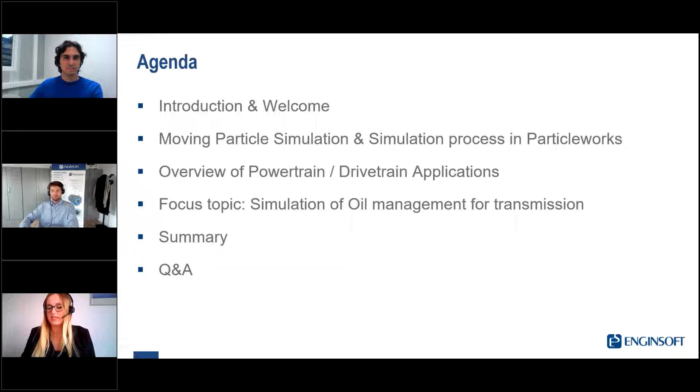Now, I would like to move on and briefly introduce today's 2 key speakers to you. First, I would like to introduce our guest speaker, Mattia Porchetta. He currently works as oil management engineer for Tremec in Belgium and will provide us with industry insights into the role of simulation on how to improve the oil management in transmissions for high-performance applications. Mattia, thank you for joining us here today.

Perhaps you'd like to give a small wave so everyone knows who I'm talking to. And I really hope I got your last name slightly right. Yes, thank you. Thank you.

The other speaker I would like to introduce to you is Simon Habecke, who works as application engineer here at EnginSoft Germany. He has prepared an introductory presentation on Particleworks and its moving particle simulation, as well as an overview of Particleworks applications in powertrain and drivetrain for you. Welcome, Simon. We are glad to have you too.

If you want to give a small wave also, so everyone knows who you are. Hello, everyone. Thank you.

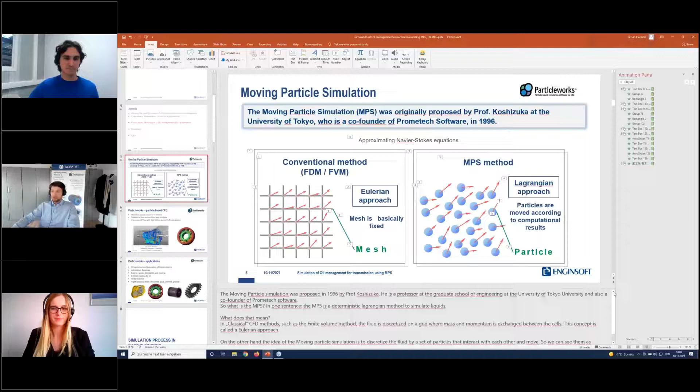So as Alina said, I will take you through a brief introduction of Particleworks and the underlying methodology, the moving particle simulation, and then also present some recent use cases that have already been presented before, and then hand over to Mattia, who will tell us a little bit about Tremec's application of Particleworks in their development process.

So Particleworks is a particle-based CFD tool which uses a numerical method called the moving particle simulation. The moving particle simulation was originally proposed by Professor Koshizuka, who's a professor at the University of Tokyo at the Graduate School of Engineering. He is also a co-founder of Prometech Software, which is the developing company behind Particleworks, and he proposed this method basically as an evolution to the smooth particle hydrodynamics in 1996.

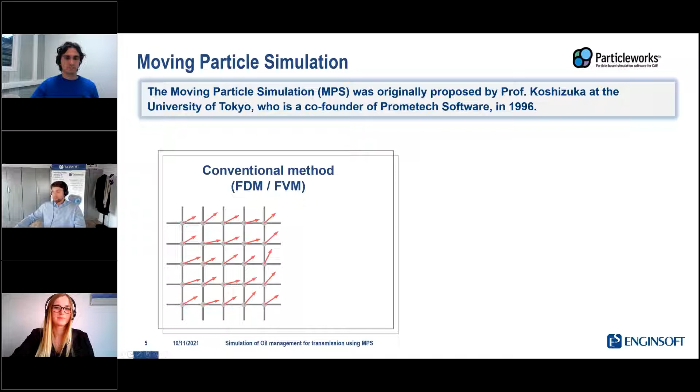So for those of you who are familiar with CFD in principle, you might be familiar with the so-called finite volume method, which is an Eulerian CFD methodology where you basically discretize the fluid volume with a numerical grid on which the fluid movement is solved and simulated. Instead, the MPS, so the moving particle simulation, uses a particle-based approach. So that's the definition of a Lagrangian approach, where the fluid is discretized by a set of dynamic particles.

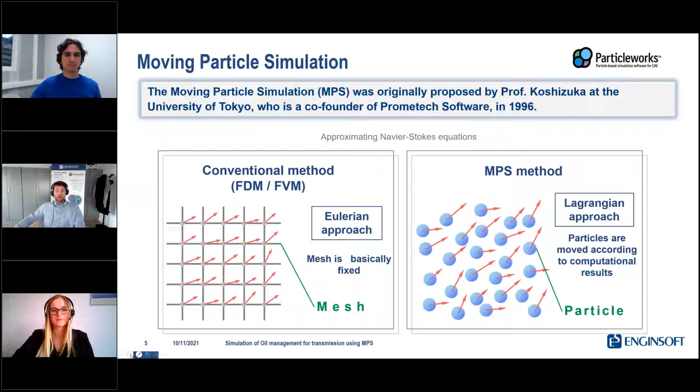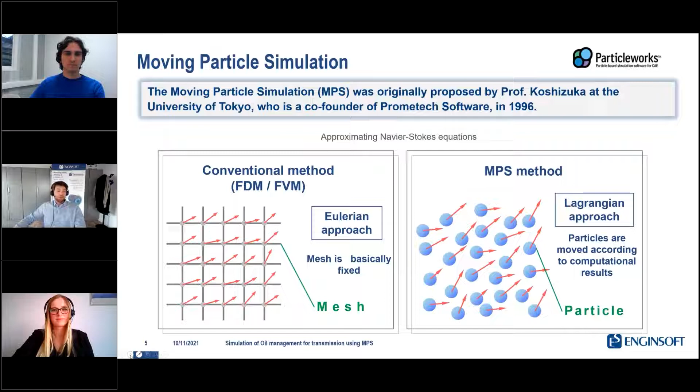So basically, we can understand our particles as dynamic calculation points which represent our fluid, and these fluid particles interact not only with each other, but also, of course, with the other boundary conditions that we can impose on the simulation model. And also the MPS, just as most of the finite volume methods, approximates the Navier-Stokes equations as the fundamental governing equations in computational fluid dynamics.

So Particleworks is a tool that, as said, uses the MPS. Since we do not need to extract the fluid volume, but instead can discretize the liquid with our particles, we're talking about a mesh-free method, which is especially suitable to simulate free surface flows and related problems like liquid sloshing or liquid jets.

And then, of course, as we see here in this animation, we can also simulate the interaction not only with rigid bodies, but there would also be other applications where we can potentially extend the model to also introduce sand into the gearbox, for example, which in real life, of course, we want to avoid, or also include flexible bodies into the system. And what we see here on the right-hand side shows Particleworks' capability to also simulate highly viscous or non-Newtonian fluids such as grease.

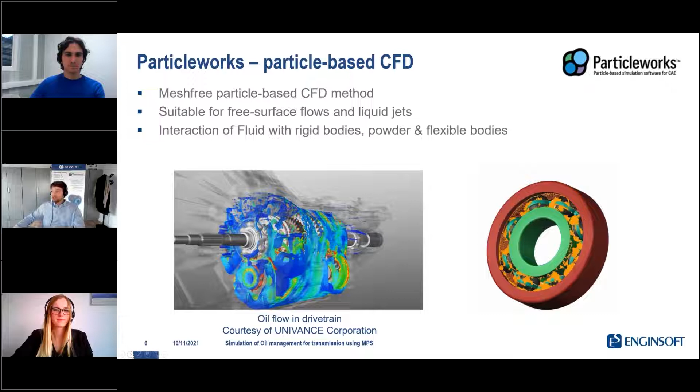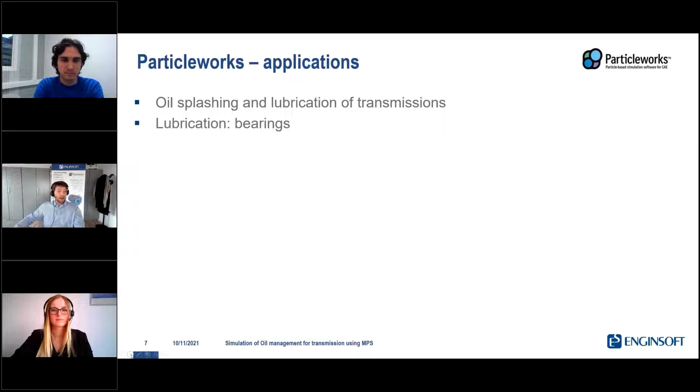So the type of applications which we can handle with this sort of methodology range from oil splashing and lubrication of gearboxes and transmissions, and we will learn later more about that from Mattia. Then in the overall topic of lubrication, of course, we can also have a closer focus on the bearing itself.

Then with the same methodology, we can also handle certain applications in the field of engine or piston lubrication and also cooling. So this actually covers both conventional internal combustion engines as well as electric engines, which nowadays are more and more internally cooled by oil jets.

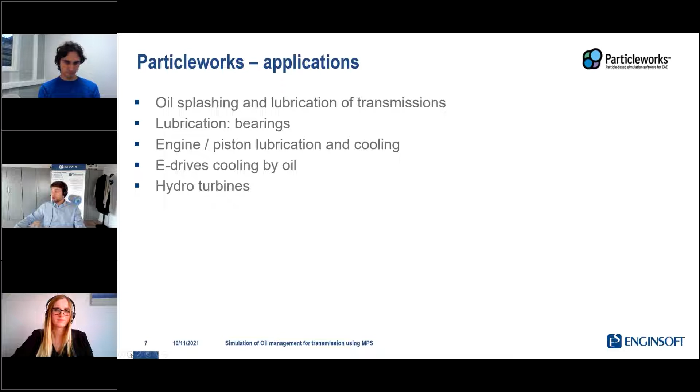Then in a slightly different industry, in the energy sector, we can also perform simulation of hydro turbines, which is particularly efficient for turbines like a Pelton or a Banki turbine, where we also have free surface flows. And then more focused on the process or chemical industry, we can also simulate highly viscous or non-Newtonian fluids ranging from chocolate, glue, cement, or grease, just to give you some examples.

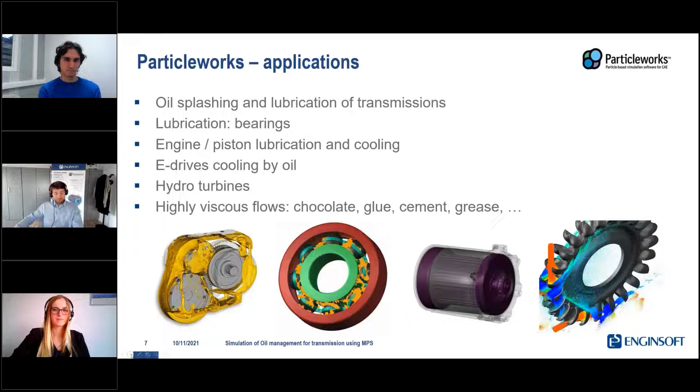So now we see all these nice animations which show some of the visualization options that Particleworks can provide us during the post-processing. So in the next slides, I will give you a very brief overview to give you some impressions about how such a simulation is potentially set up, to give you an idea of the simulation workflow.

So the first step actually takes place before the simulation, with the geometric preparation of the model, which we then import into Particleworks. In principle, we do not need to perform any larger simplifications, but we just export each part, like a shaft or a gear, that later in the simulation model we want to set with a separate kinematic motion, as separate STL or OBJ files, which are the formats that Particleworks can read. So inside of Particleworks, we import the non-simplified geometries.

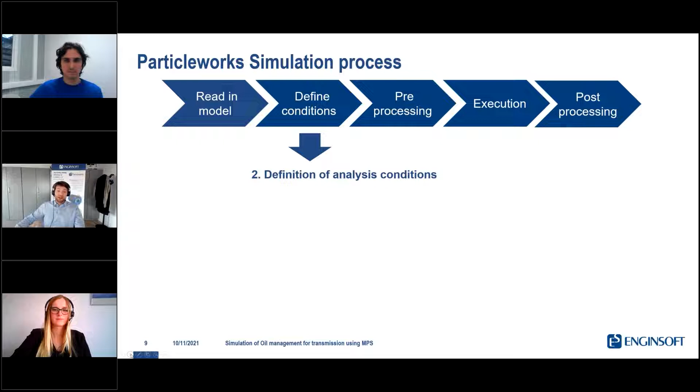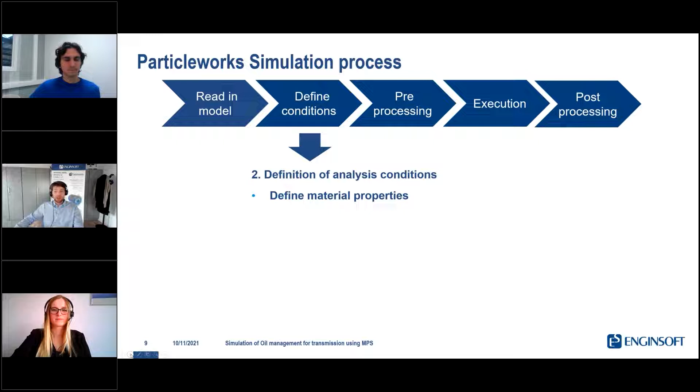Then in the next step, we define the analysis conditions. That includes, first of all, the material properties which characterize our fluid. For oil, this would be the density, kinematic viscosity, some surface tension parameters. Then we also need to define the kinematics, so the motion of our shafts and gears.

And then to introduce the oil or the liquid into our simulation model, we can define, or actually both in the same model, a filling plane, which can introduce an initial fill level into the simulation model, and also create inflows and outflows, which can introduce new oil into the simulation and also take oil out of the simulation. And therefore, this also enables us to model forced lubrication systems.

Then, since we're talking about a simulation tool, we also need to set some numerical parameters like the time step, which is typically estimated by our rotational speed, and the particle size which we are using for the simulation, plus some other numerical settings, which we won't cover in this webinar.

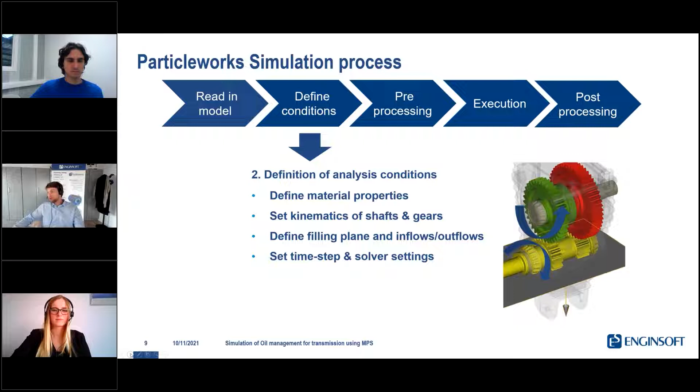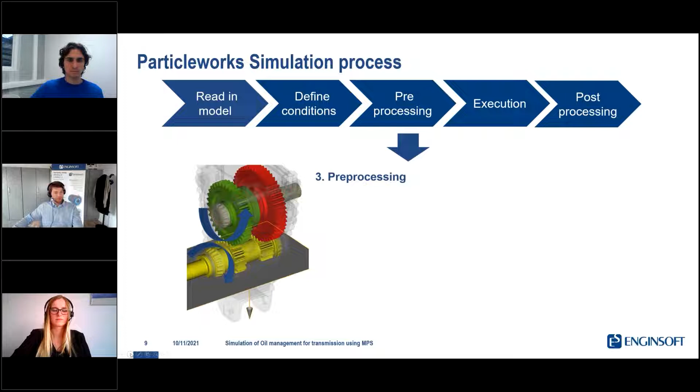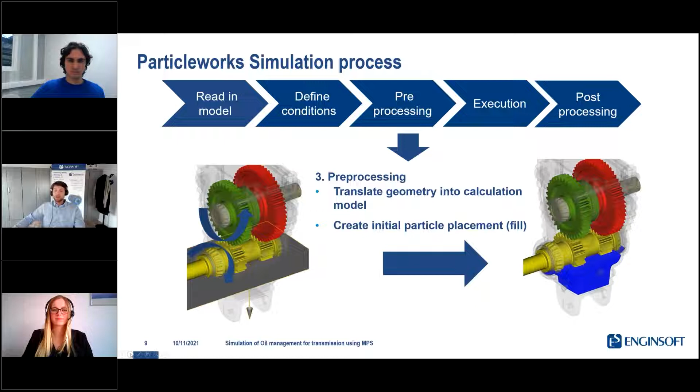So after we imported the geometry and defined our kinematic conditions, the pre-processing of course comes next. We perform the pre-processing, during which the geometrical model is first automatically translated into the internal calculation model, which is used by the actual simulation. And then the initial particle placement, for example during the fill operation, is also performed, so that our gearbox might already be pre-filled with oil particles.

Then during the actual simulation, we perform the calculation, which will calculate our liquid movement. We can use one or, depending on the model size, multiple GPUs. We can also leverage CPU clusters, while according to our experience, the use of GPUs is more efficient. The software runs both on Windows and on Linux.

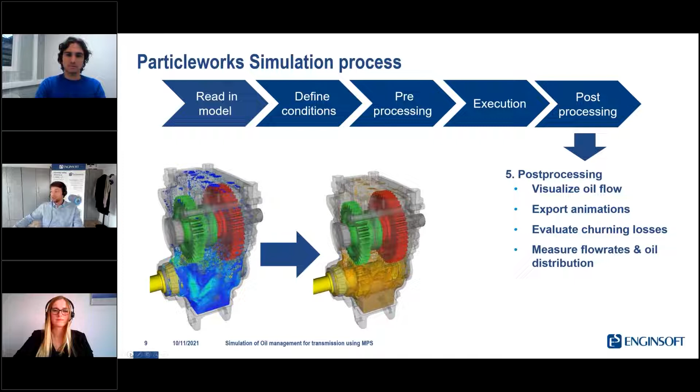And now coming to the aforementioned post-processing. This gives us the insights we are looking for by using the simulations, which can be the visualization of the oil flow. We can export animations, in principle also evaluate the churning losses, and also measure flow rates and the oil distribution in different parts of the housing.

So the advantage such a meshless simulation approach gives us is the overall reduction of the simulation time, since we do not need to simplify the geometry, we do not need to perform any meshing, and it's very robust and easy to implement complex kinematics.

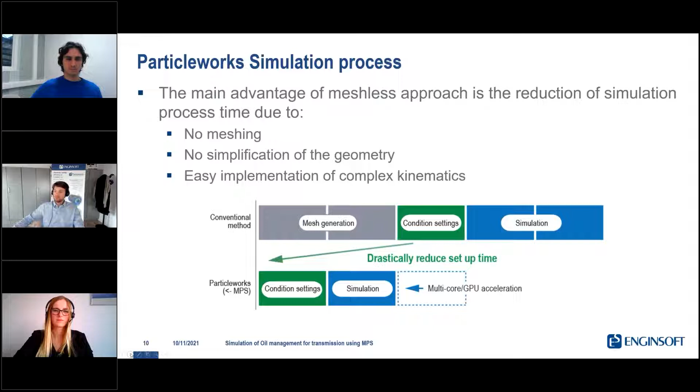So now coming to some applications that have been presented in webinars or at conferences before. I will just give you some key points.

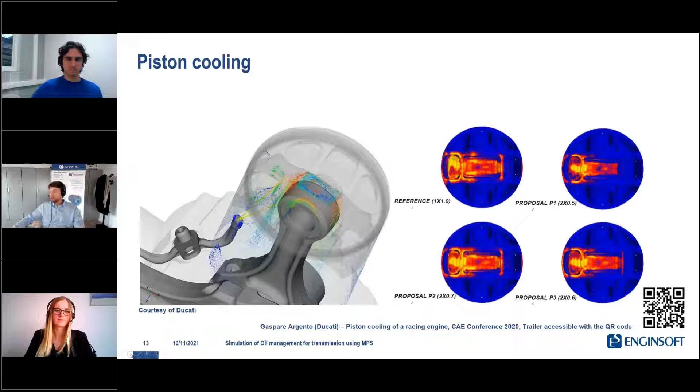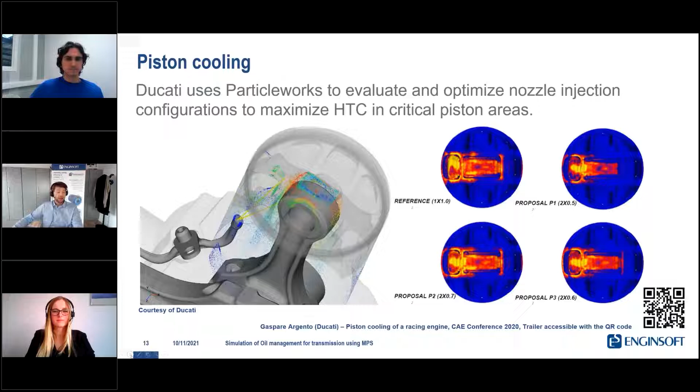So the first application I wanted to give you a brief peek into was presented by Ducati Corse at the CAE conference last year. In this case study, Ducati presented their application to evaluate and then also optimize different nozzle configurations with the aim to maximize the HTC distribution on the undercrown of a motorcycle piston. If you scan the QR code on the bottom right side, you will come to a link where you can view, I think, a trailer or a review of the actual presentation.

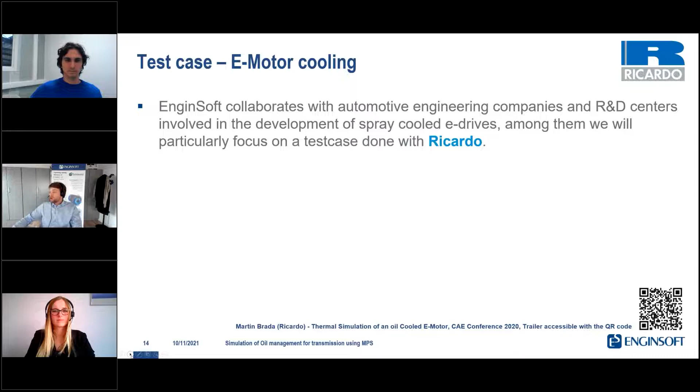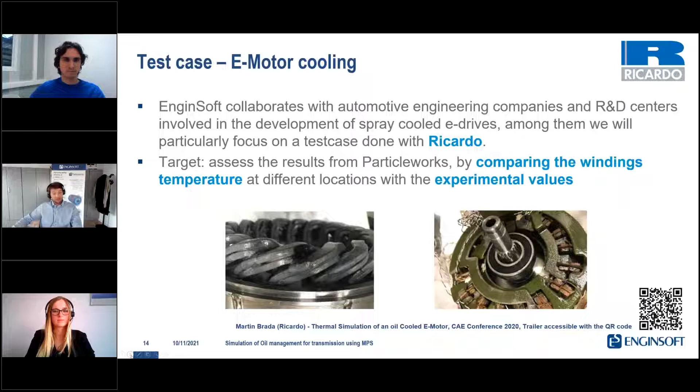Then a similar application, from a software perspective in terms of what was simulated, was also presented at the last CAE conference in collaboration with Ricardo, but this time the aim was to simulate the internal oil cooling of an electric motor, with the target to compare the winding temperatures at different locations with experimental values. In that simulation workflow, Particleworks was used to simulate the oil distribution and HTC distribution on the windings due to the oil jets sprayed from the rotor shaft, to finally calculate the resulting temperatures in the windings with the help of an FE tool.

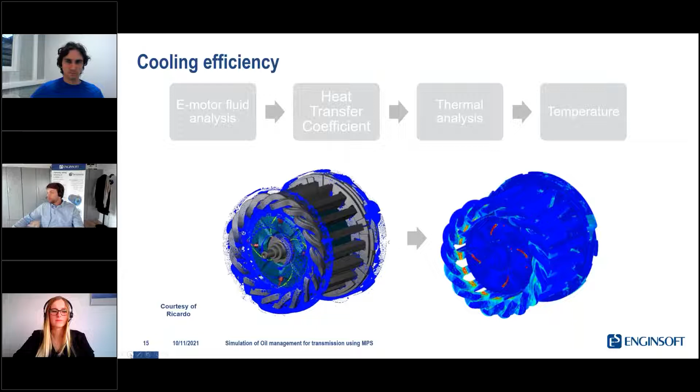In the result of this case study, we are also provided with some absolute values regarding the difference between experimental values and measurements, which were below the requirement of 5 degrees Celsius. So this gave some confidence and validation into the use of Particleworks for such applications.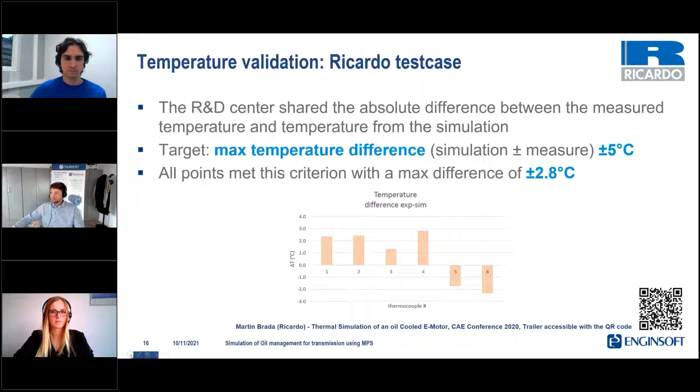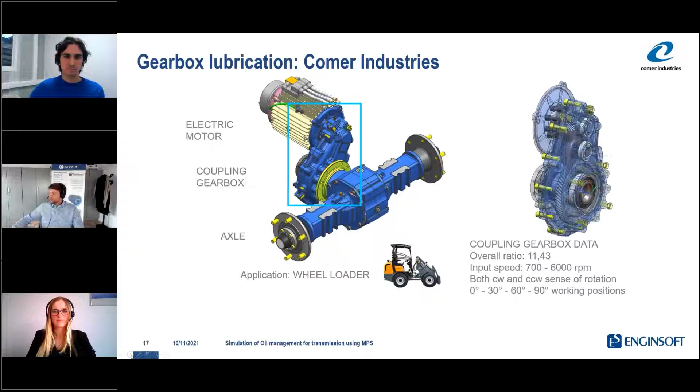Now I will come to the last case study, which was presented by Comer Industries at the CAE conference 2019, or actually 2018, where the objective was to simulate the oil distribution in a coupling gearbox between an electric motor and an axle of a wheel loader. The aim was to compare the oil distribution in different operating conditions, like the mounting position and the operating speed, and finally to assess the bearing lubrication in all these different operating conditions.

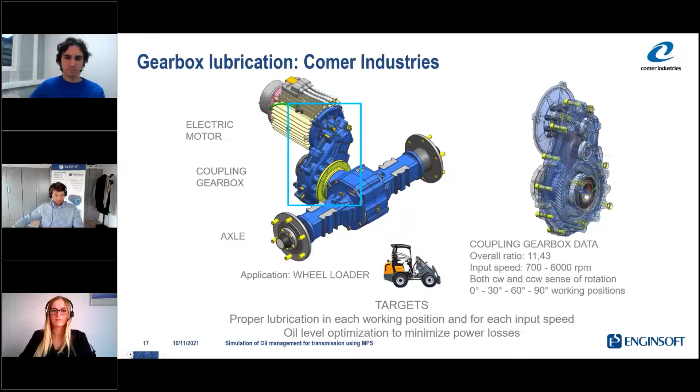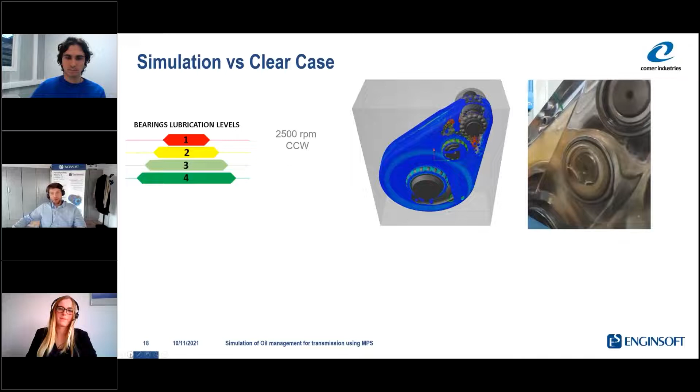In here, they not only did a visual comparison of the oil flow patterns, but also evaluated the qualitative lubrication of the different bearing positions with the help of a qualitative scale. Comer found that there was a very good correlation between simulations and tests for this type of gearbox. Just by the coloring, we can see that there was a very good correlation. My personal highlight is this flooding of this bearing, which could be identified both in the simulations and the experiments.

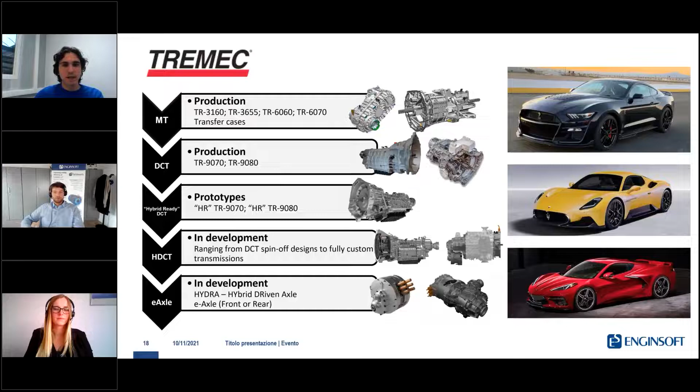For the test case of today, I will refer to the TR9070. As I said before, it's our inline DCT transmission. It's 7-speed, it can transfer up to 900 Newton meters with a maximum input speed of 9,000 RPM, and it can shift in very short times of only 80 milliseconds.

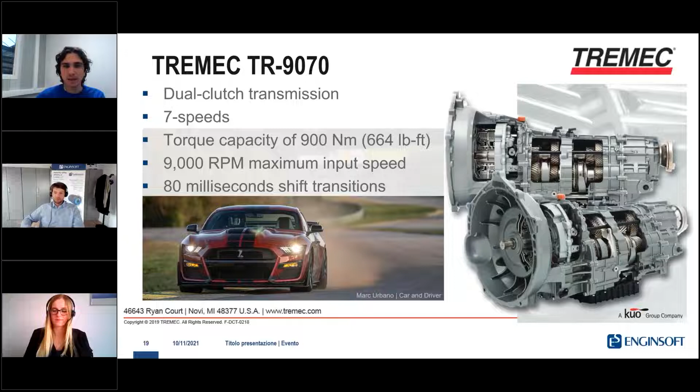So why is oil management important for our transmissions? First of all, because of lubrication. In general, we want to avoid metal-to-metal contact between mating surfaces, as this can lead to excessive wear or even damage and potential failure of the part. The lubricant can also act as a coolant, so it's needed to dissipate the heat generated. There can be different lubrication strategies, for example splash lubrication or forced lubrication. So it's important to have proper lubrication in the transmission, and to do this efficiently.

Well, I think that all of us know that it's very important, for example, nowadays for car manufacturers to keep the fuel consumption low. But not only this: inefficiency will translate into heat generation. This can potentially lead to high temperature, overheating and hotspot issues. So being efficient means that it's going to be easier to design a proper cooling circuit and cooling system, and also downsizing some of the components like the heat exchanger.

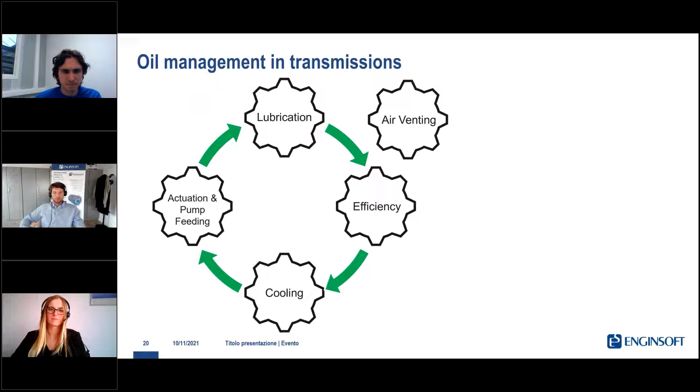So how do we monitor all of these parameters? Well, first of all, we started with CFD. We extensively use the moving particles method. During last year, it turned out to be quite effective, and it's a powerful tool. It gives you a lot of flexibility. It's very easy to change the geometry and perform thought experiments like playing with the input conditions and the boundary conditions. And we mainly use this to drive the design from the very early phases of our project.

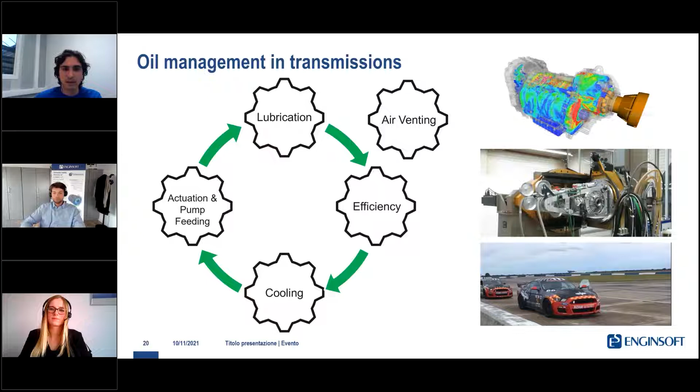The final validation, of course, has to happen in the vehicle. This, I will say, is the least flexible kind of test because it's very difficult to access the transmission. It's time consuming and also very, very expensive. So usually you want to perform this kind of test during the advanced phases of the program. You don't want to really use this kind of test for the initial development of your products because it's going to be very, very expensive.

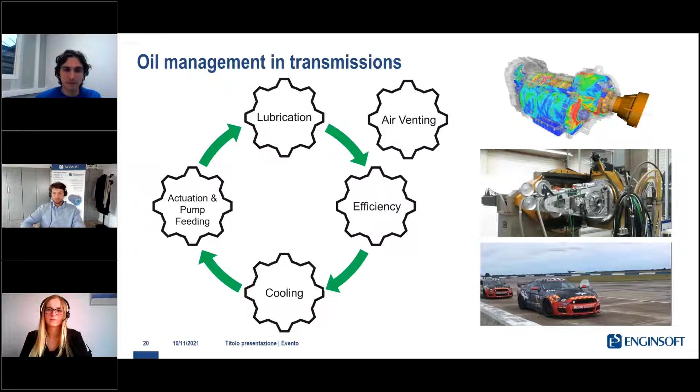So what happened with our TR9070? Actually, at that time, we were not using the moving particle simulation method. So we didn't go through the workflow that I just presented. And we ended up in a very late stage of our program with a suction issue. This happened in the vehicle. We were testing at Gingerman track, and in a specific corner with a specific driver, what happened was that after the long straight, when braking into a left corner, we experienced some oil starvation in our sump pan, and this led to a system pressure fault with the clutch disengaging and not being able to transfer the torque for a while.

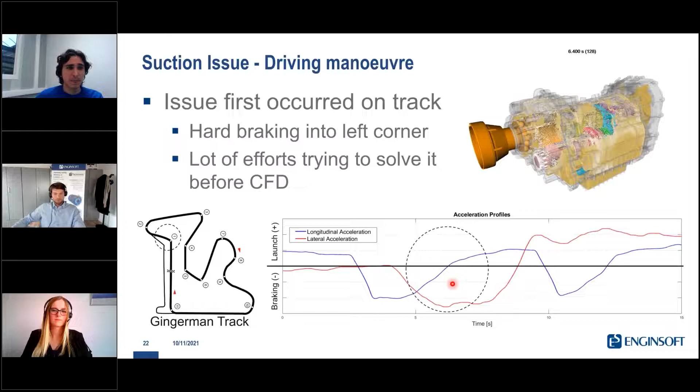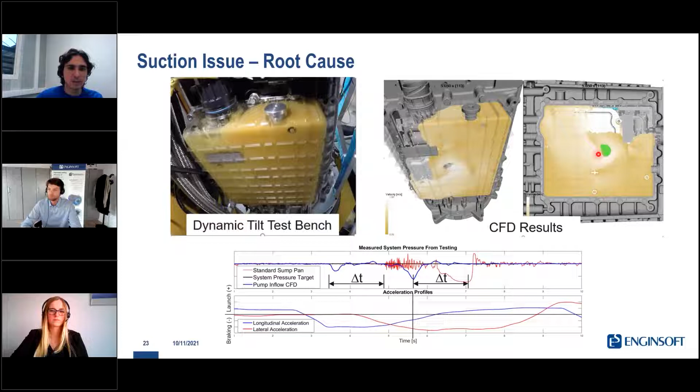Another thing that we noticed from the CFD results was this kind of swirling motion. So the oil tended to move along the outer walls of the sump pan, leading the pickup of the pump or the inlet of the filter to be exposed to air.

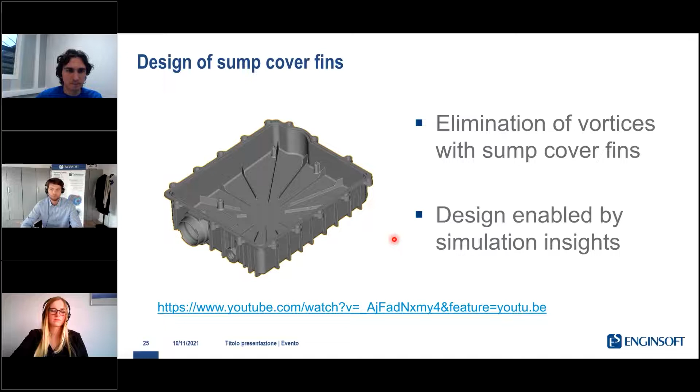So what we did, well, as I said, we were in an advanced stage of our program. We needed to find a quick solution, and we tried to introduce some guiding features, some fins in the sump pan, with the idea of forcing the oil to always move towards the center of it, where the inlet of the filter was located. We then performed a CFD simulation to compare the standard sump with a modified one. And what we saw was that during the critical condition, the swirling motion disappeared, and the inlet of the filter was mainly submerged in oil.

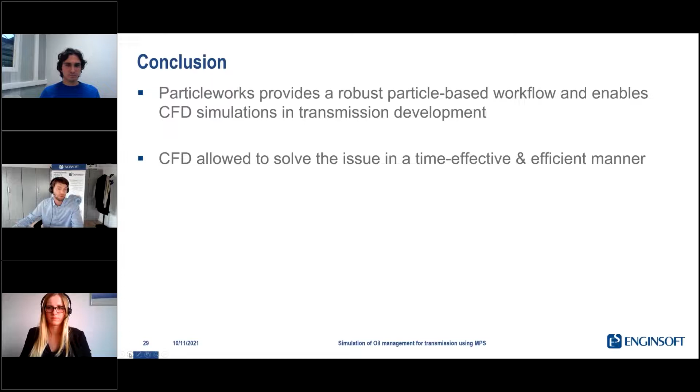So I will draw a brief conclusion of today's webinar before we go over to the Q&A session. So we have seen that Particleworks provides a robust particle-based workflow, and also enables CFD simulations in the transmission development. And then, as Mattia pointed out, this use of CFD in the development process allowed us to solve issues that were very difficult to solve before, and also in a time-effective and efficient manner, with some good correlations between simulations and tests, overall really bringing down the development time and improving the product by also gaining deeper insights into the design.